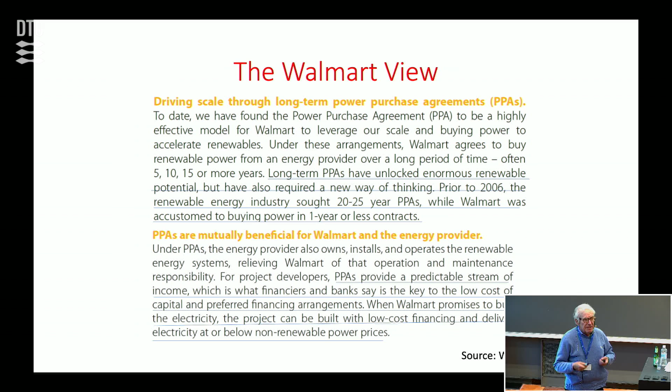So they finally have come to a decision that they will sign PPAs on the order of 10, 15, maybe 20 years, and they would use the fact that they have a very high credit rating to provide the developer, who may have a rather low credit rating, with financial security. The PPA provides the backing for going to the capital market to borrow money to finance the development of these facilities.

David Newbery has done quite a bit of analysis in the context of the latest reform of the system in the UK, or Great Britain, I can never keep them all straight with all the aggregations. I think it doesn't include Northern Ireland. But basically he shows that if you can shift some of the risk to creditworthy buyers, in the case of the UK, the government, you can reduce the cost of capital very significantly and reduce the ultimate cost of the PPA. So that's what's driving this.

So I'm going to focus on the U.S. Let me just say a little bit more about ISOs than Dick did. First of all, this picture, I want to make two points. First, it's not to show Canada as the 51st state. It turns out that for many years, the electric power systems between Canada and the U.S. are synchronized with one another. The major exception is Quebec, which has its own hydro-based system.

They export to the U.S., especially to New York and New England. However, integrating them into an AC system would be very challenging, so they're DC connected. But basically, the U.S. and Canada have integrated systems.

But you'll also notice on this chart that there are blank areas, and there are blank areas because we have utilities, primarily vertically integrated utilities, that are not in any ISO. Up here, you can see that the US system is really quite complicated from an industrial organization perspective. There are investor-owned utilities, regulated by both FERC and the states. Some of them are vertically integrated, some have divested their generating capacity, some are in ISOs, and some aren't.

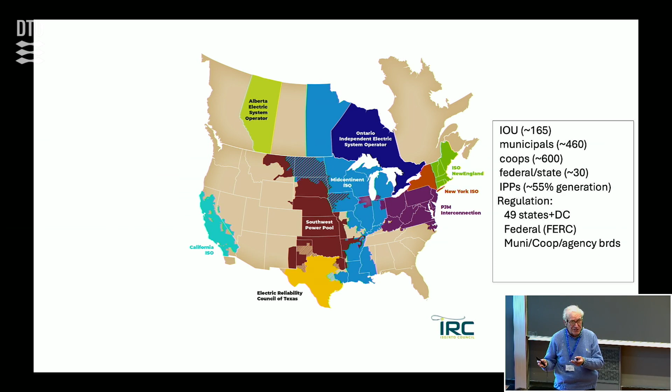If you follow elections, we have red states and we have blue states. For reasons a political scientist really has to answer, the blue states are the ones that have restructured and rely on competition, and the red states tend to be those that haven't, or if they've joined ISOs, they tend to still be vertically integrated utilities.

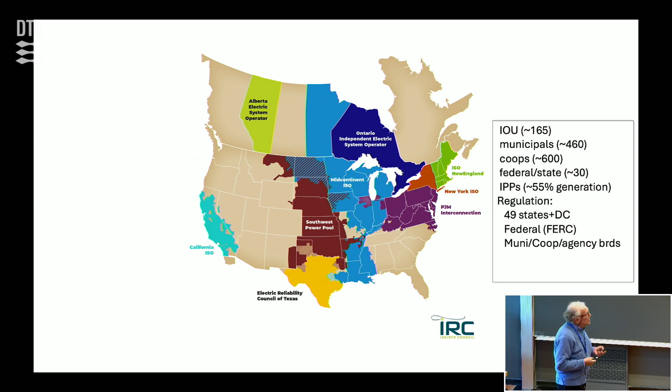So Dick talked about the ISOs. I'd like to just show you some examples. I won't go through what ISOs do because Dick discussed that. But here's PacifiCorp, a partially vertically integrated utility in the Northwest US. It's not in an ISO. It's owned by Warren Buffett's company, Berkshire Hathaway. They have an energy company, and their largest share ownership is in PacifiCorp, which serves multiple states in the West.

They also own Nevada Power, now NV Power, as a separate utility. And they operate in states, particularly Washington and Oregon, that have tight decarbonization commitments. They also operate in, I think that's Utah, which doesn't. So they face some challenges in how to balance their system, and they do it based on traditional integrated resource planning, figuring out the cheapest way of meeting demand. They've concluded they're closing their coal plants and putting in investments, especially in wind and some in solar.

Wyoming, which is up here somewhere, has a lot of wind, especially down here. Unfortunately, no one lives in Wyoming. There are a lot of cows, cattle, horses, rabbits, but less than 700,000 people live there, and that many people went to my high school in New York City.

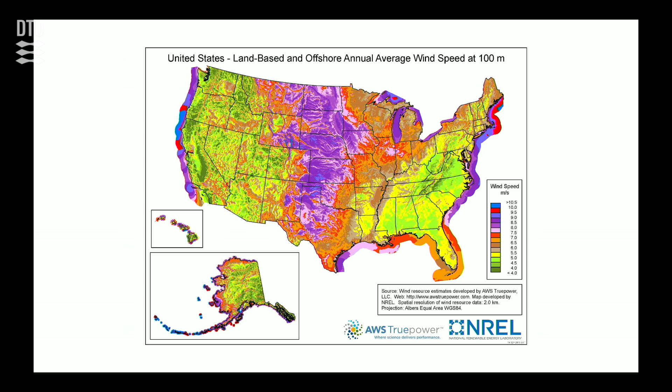Okay, so where is the wind and the solar? Unfortunately, it's not everywhere. The big wind zones in the US are in the Great Plains, stretching into Canada, all the way down to northern Texas, the Panhandle, and along the Atlantic coast, especially up in the northeast, and along the Pacific coast. The difference between the Atlantic coast and the Pacific coast is on the Atlantic coast, you can put wind, but you've got to put it where people can't see it.

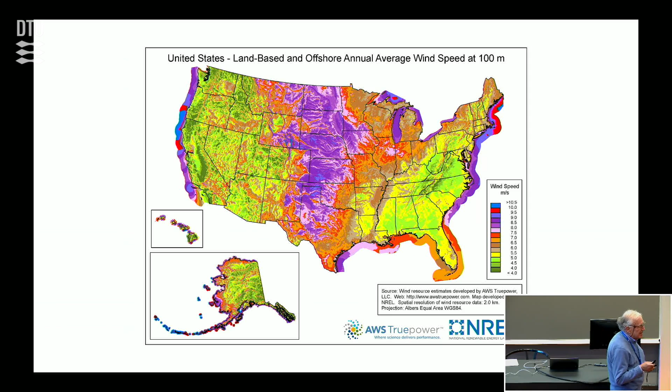I think Dick said they're too noisy. Well, if it's 30 miles away, it's hard to hear, so you get less opposition. Unfortunately, there are no incumbent transmission facilities 30 miles out in the ocean, but it's shallow, so they can use well-developed European technology to develop wind. I'll come back to talk about that, because several European companies have had some bad experiences in the Northeast, especially recently. Along the Pacific coast, it's deep, and you've got to use floating windmills, and there really have been none developed there. If you look across the world, there aren't that many floating windmills, and I think that technology is still relatively new.

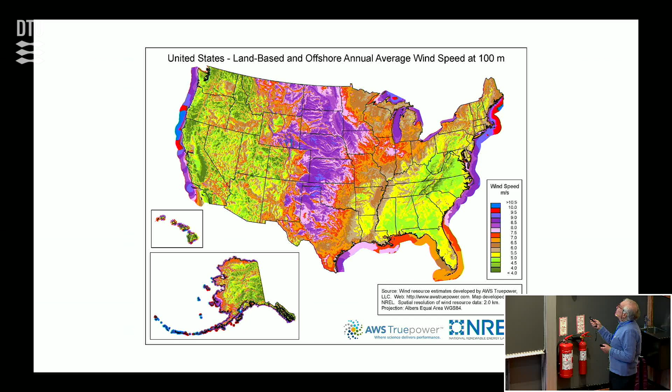So the wind belt is where wind is really important. Then there's some areas in northern Maine and in northern New York State, and in principle in the Great Lakes, that are pretty windy. The problem is northern Maine looks great on the winds, but there's no transmission up there. There's nothing up there, actually. A few people live there.

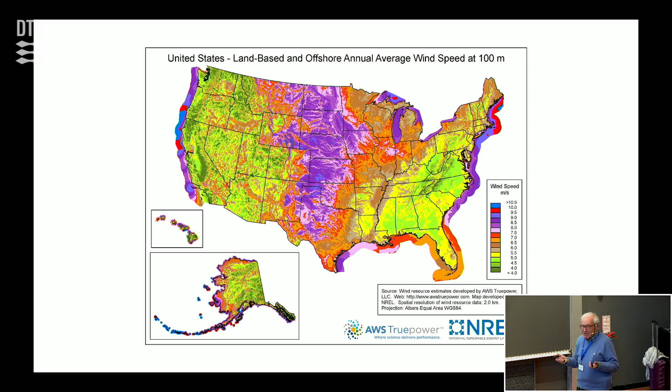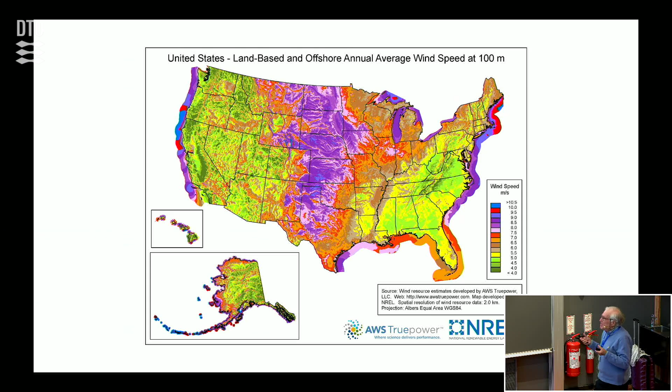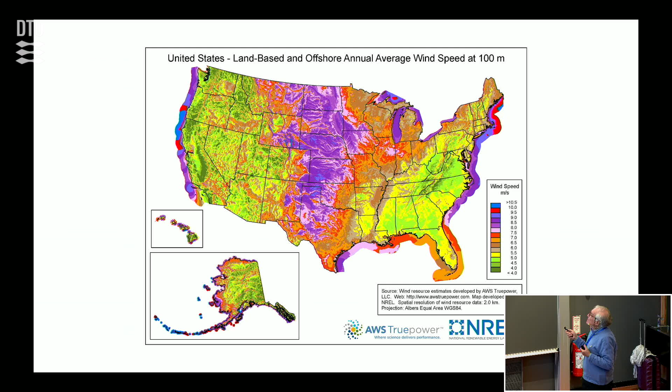There used to be trees there. They cut them down. They used to farm potatoes, not very profitable these days. So transmission becomes an issue for accessing these areas and bringing the power from where it's cheap to produce to where it's needed, where the demand centers are. So, for better or for worse, not that many people live there, and there's not that much load in that part of the United States. Now, sun is the same story.

If you've been to the US, especially the Southwest in the summer, it's sunny, it's hot, big empty areas—ideal for solar farms. The Southeast, it turns out, is pretty good, but the air is dustier, and you get more reflection. And the Northeast, where we have all these commitments, is terrible.

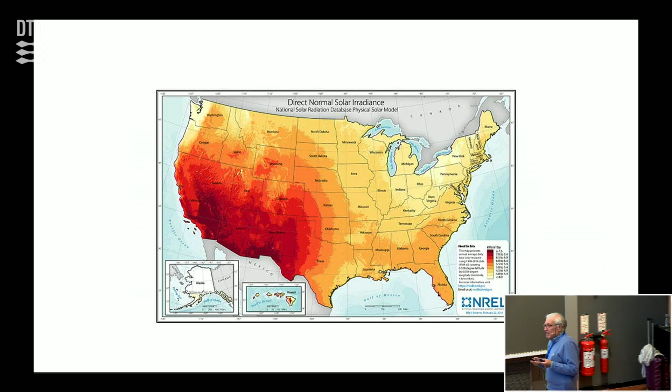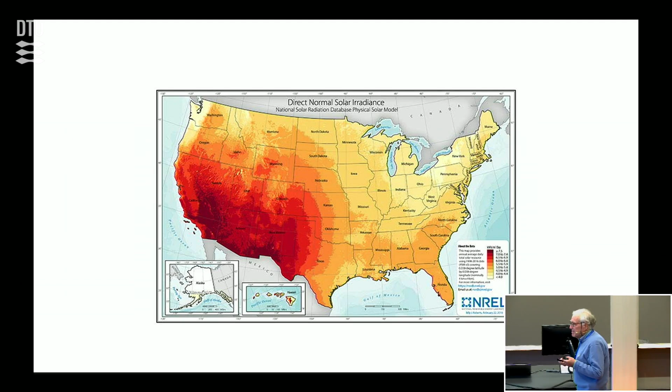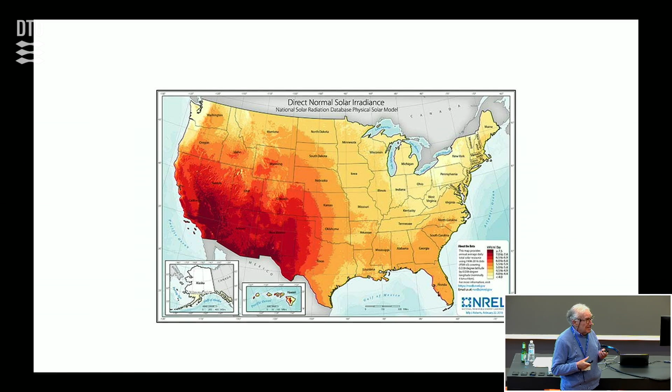The economics of solar there are bad, and they've had to be subsidized very heavily. They've especially subsidized rooftop PV, which for reasons that escape me are always outside the calculations. But that's been very important, especially in Massachusetts, believe it or not—adjusted for population, it's the third most solar-intensive state in the country because of massive subsidies.

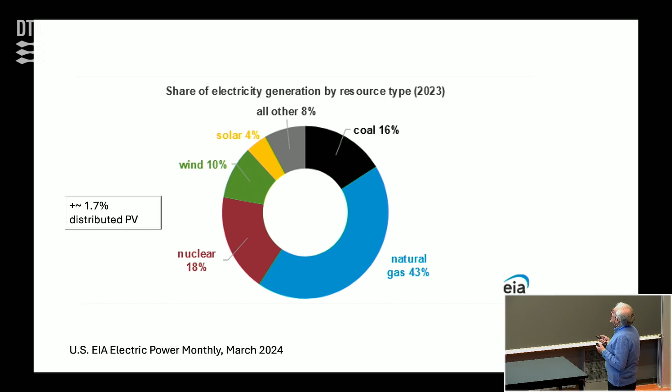Okay, so overall for the U.S., we have about 15% wind and solar. We still have quite a few nuclear plants. Coal has gone from 53% of electricity generation to 13, 14, 15, 16%—it varies by year, last year was a little higher. But coal plants are retiring rather quickly, either for economic reasons, cheaper natural gas in particular, or because of this push to add wind and solar and the economics associated with that. Overall you can see wind and solar, this is March 2024.

It's probably over 15, 16% now in the US, but it varies by state. Let me just make this point: if you look on the margin—this is before Trump was elected, in 2024—almost all the new generation was wind, solar, and batteries. So the U.S. was on a path to decarbonization with a combination of federal laws, which I'll come back to, state laws, which are binding in many states, and reductions in cost of wind and solar.

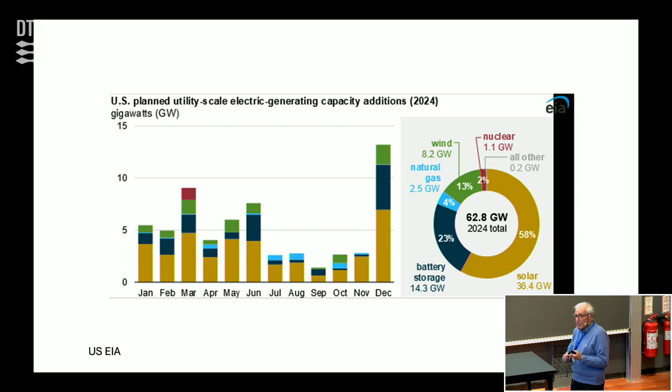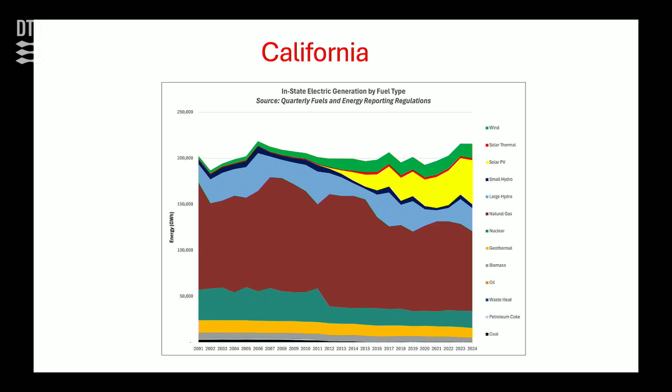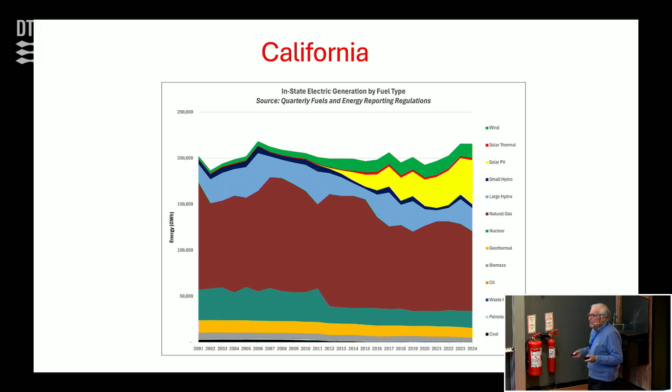Now the states vary. This is California, which has a net zero commitment. It's also the first state to develop wind. It has quite good solar resources, especially if they can be brought in from the desert with transmission lines, which are being built in California. You can see this is wind, and this is solar—that's thermal solar, which had a brief enthusiastic development. This is large hydro. They still have nuclear there, two plants operating, and they have no coal—it's gone. They have gas, quite a bit of it, and they also have batteries, which I'll come back to. So they're on their way to decarbonization as a result of state and federal government policies.

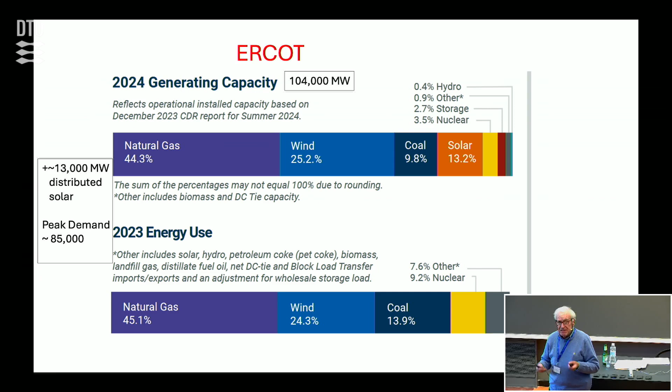And this is Texas, ERCOT—an oil and gas state. But the economics are so attractive for wind and solar there that Texas now has the largest generation from wind and solar energy. They still have a little bit of coal, a little bit of nuclear, but wind, natural gas, and solar are their big sources of generation. As you might expect, since it was an oil and gas state, the governor is trying to do something about this—he thinks this is terrible. He thinks for reliability reasons we need more gas plants, and they're in the process of putting in state regulations to try to restrict the expansion of wind and solar and to promote natural gas.

So what are the attributes of wind and solar that are relevant here? For my discussion, the primary attribute, aside from the intermittency issue which the ISOs are trying to deal with—there are other attributes. In the case of wind, it varies by time of day, can vary by season, it's location dependent, and its costs are mostly capital costs. This is the primary consideration: it has very small marginal operating costs, on the order of $2 a megawatt hour, so the short-run marginal cost is very low.

Inverter technology has issues, at least up until now—it's limited the provision of ancillary services without also having batteries. But smart inverters are being developed; it's a research area, and my colleagues in the electrical engineering department at MIT who work on power electronics assure me this will not be a problem in the future.

I hope they're right. Solar has some similar attributes: it's intermittent, it's seasonal, and unfortunately the sun doesn't shine at night—someone ought to fix that. People always say, well, that's because the sun goes down at 7 o'clock. Well, the sun doesn't go down, the earth rotates. But nevertheless, for explaining it to your neighbors, you tell them the sun goes down. And then they say, well, what do you do then?

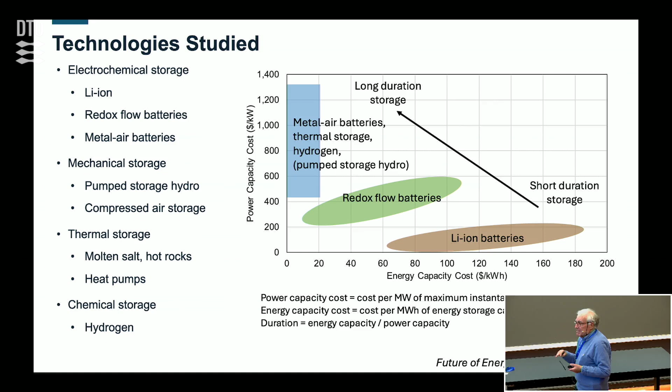The technologies being developed, redox flow batteries, thermal storage batteries, frequently referred to as long-term storage, have higher capital costs but lower storage costs, lower kilowatt-hour costs. In the long run, we're going to need those as well to deal with long periods of time when there's no wind, or periods of time when demand is fairly high at night in a solar-dominated system.

And our study is online. You can read it. It's kind of outdated.

Yes, sir? I have a question about the energy cost. Do you have some update from '22? No, we haven't updated. But I'm sure the costs have changed. Yeah, hopefully for the better.

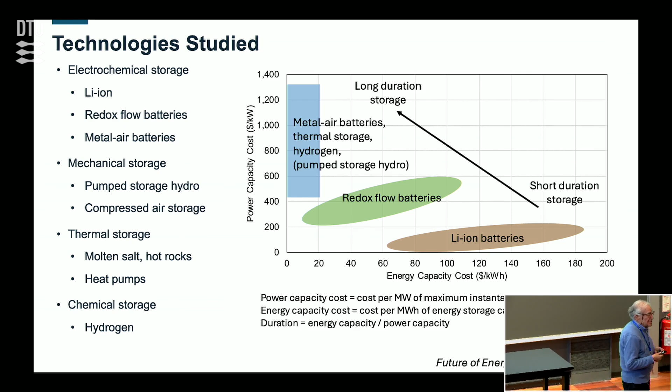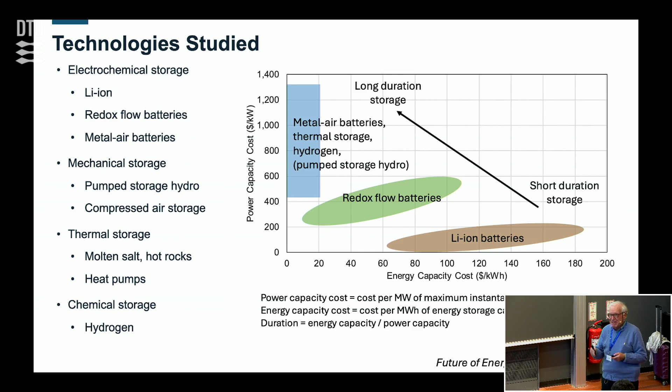I should say something about doing these studies. This was interdisciplinary research, so we had economists, scientists, chemists, and physicists. We had quite a few engineers from chemical engineering and mechanical engineering. Their notion of a good number for a cost and my notion of a good number for a cost are rather different. I wouldn't say they make up the numbers for future technologies, but kind of do. Whereas for lithium-ion batteries, we had pretty good numbers for what the cost would be, because we had lots of examples from EVs and applications in the US and other countries. Just a comment on interdisciplinary research in terms of what people think is most desirable.

Okay, so this is an important part. Where is this demand for long-term PPAs coming from? It's coming from a number of different sources. The first source is states, like my state, that realized they were never going to meet their commitments to decarbonize if they just let the market work. So they've gone out and done required and managed procurements of wind and solar. Massachusetts, Maine, Connecticut, New York is very big on this, New Jersey, Maryland, District of Columbia, Illinois, California, although that's further on the horizon. They've basically said, okay, we're going to procure, and so far in New England and New York, 30 gigawatts of batteries and offshore wind by 2035. We've identified leasing areas, and we're going to incent developers by taking competitive bids for wind generation meeting certain criteria.

Another source is just load-serving entities, that is traditional utilities, in states that have decarbonization commitments and have required the utilities to go out and purchase wind and solar using 15 to 20-year PPAs. In California, to meet their reserve obligations, the local utilities must purchase at least 65% of their generation under long-term PPAs with wind and solar, and more recently batteries, to help meet the state's commitments.

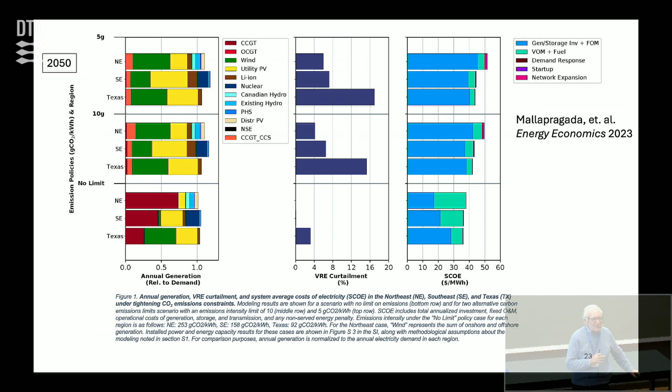The model — this is when using models, you have to apply a little bit of external knowledge to it — the model wants to build nuclear plants in New England. It just loves nuclear plants in New England, even if you put in pretty high costs. The thing is, if you live in New England, the thought of getting a new nuclear plant licensed is really hard to imagine.

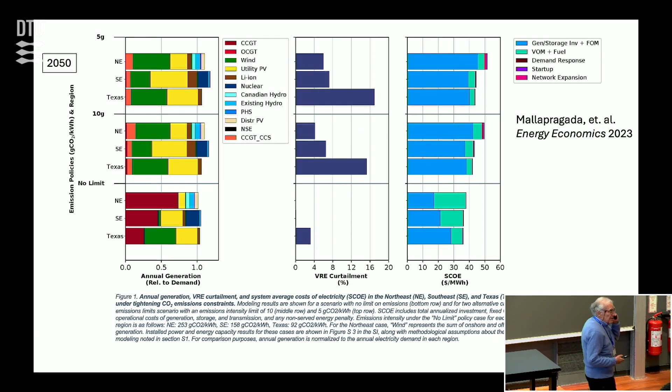So we just turned it off because we thought it was unrealistic, at least at the time frame we were looking at—this is 2050. Maybe it would happen, depending on what happens to costs and safety and so on. But because of the nature of the underlying resources, it wanted to build nuclear even at fairly high costs. We decided we wouldn't allow it to do that. Nuclear is an option we want to give some consideration to down the road.

Another point I want to make: when we make it very constrained, that's 5 grams per kilowatt hour of CO2, about a 95% decarbonization result. It's very little. The rest is natural gas with CCS here.

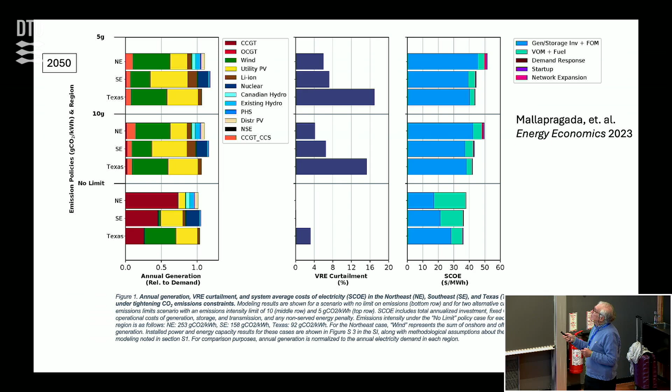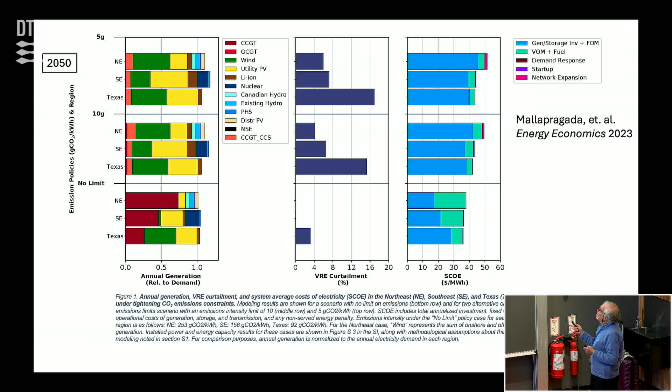As you push them to meet very tough decarbonization requirements, they begin to converge because they've got wind, they've got solar, they've got nuclear if it's cheap enough, and they've got batteries. The brown is batteries. Otherwise they look very, very similar, but the costs are different. In New England the costs are higher, much higher. In the Southeast they're lower. In Texas they're the lowest because they have good resources.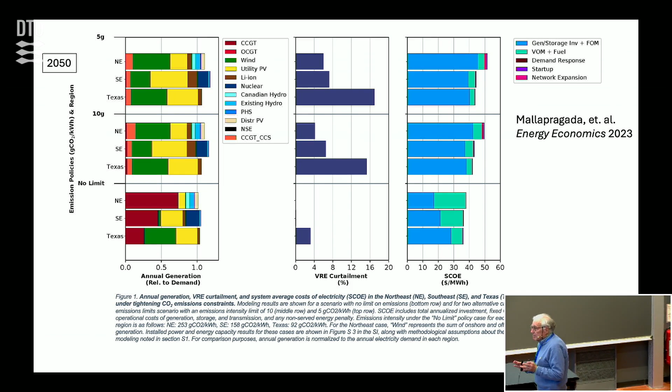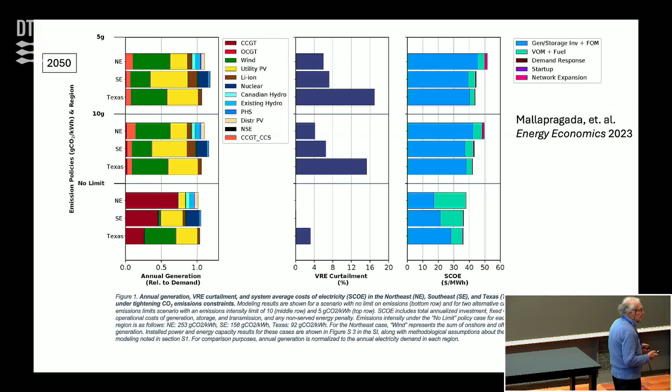And then finally, these are curtailments—that's the third point I want to make. These are situations in the model where the system is curtailed because in certain hours there's too much wind and solar to meet demand. If you're going to meet demand with mostly wind and solar on the peak days in winter or summer, there are going to be days with much lower demand where it's still windy and sunny, so you've got to turn them down. Curtailment becomes an important issue as the system approaches being fully decarbonized, and that's an issue with the PPAs that I'll discuss.

Okay, this is another part of those simulations—prices change. This is for Texas, ERCOT. This is what the price distribution looks like. It's got a lot of prices in this range, $5 to $50. As the system gets tighter and tighter, I wouldn't believe zero. This is an LP model—I don't know what happens when you get to zero, I don't know where it gets pushed, quite frankly.

So if you look at 1 gram, that's roughly 99%, the price distribution changes. You get very few prices in the middle—you get a lot of prices that are just 0 to 5, really low, close to zero because the marginal cost of these generators, they get pulled up a bit by batteries that are charging. And then you get a lot of prices that are really quite high, 200 to 1,000, compared to very few in between.

And for a developer, this is kind of scary, because we know already that when we get these price spikes—we get them rarely—the public goes crazy about them, irrationally. They don't really see most of it. And then the ISO or the regulator comes in and caps the prices. We already have caps in most jurisdictions—the ISO caps are 1,000, 2,500. It's complicated how the caps work now. But you've got to worry that something's going to happen to this market down the road.

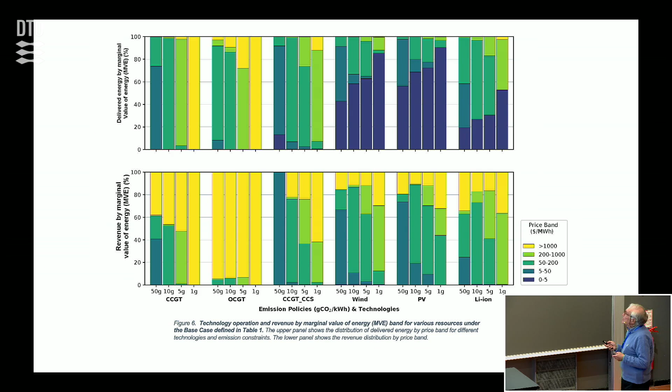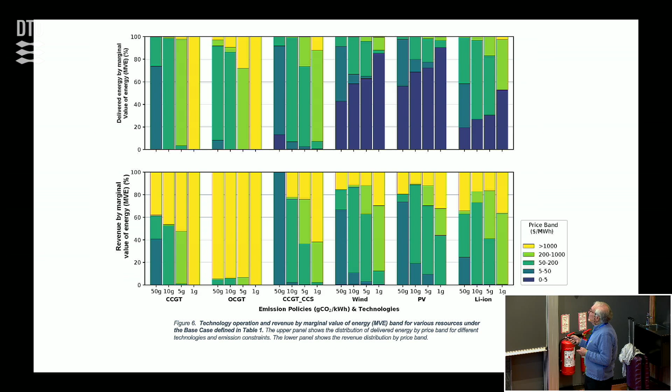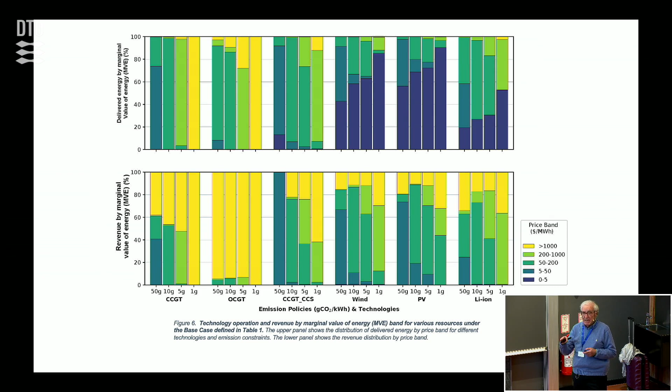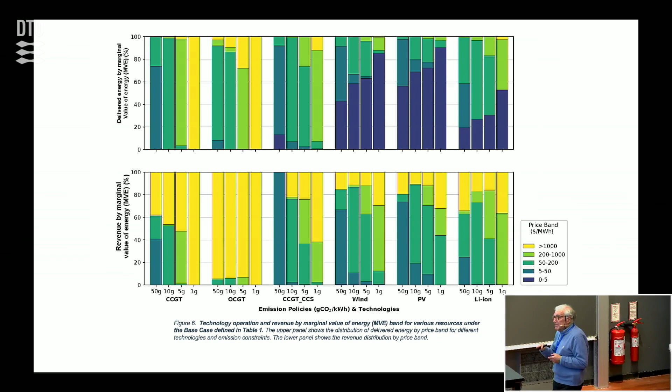This shows for different technologies how much you're relying on high prices to make them economical. If you're down to just one gram for a wind generator, you're getting most of your revenues from very high prices. You've got to be pretty confident that those prices will really be realized and not capped or diddled with in some way adverse to your interests.

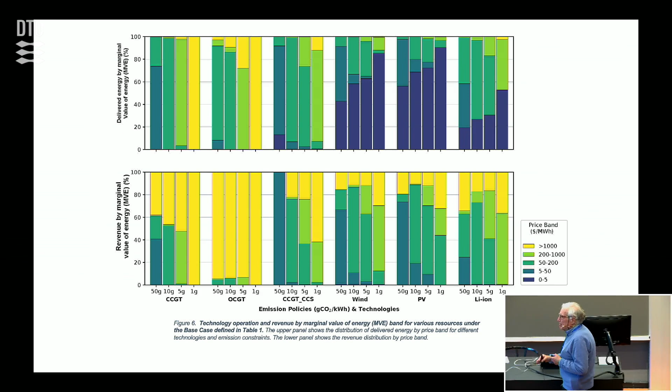Remember, high supply comes from intermittent generation—they supply when the wind is blowing and the sun is shining. They're not like dispatchable generators on an economic dispatch curve that go up and down. These suppliers just produce when they can, and it's economical when the wind is blowing and the sun is shining.

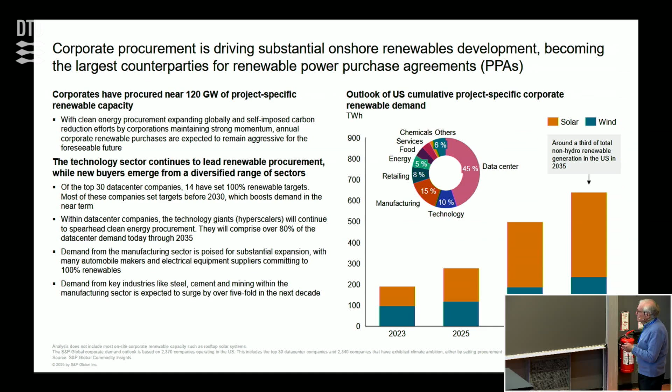Here are the companies—I don't know how accurate these numbers are, I picked them up because no one really keeps track of them too well. Amazon, Microsoft, Meta/Facebook, Google, Total—which is a French oil and gas company. AT&T is a telecom company. McDonald's, you know what McDonald's is. Verizon's a telecom company, etc.

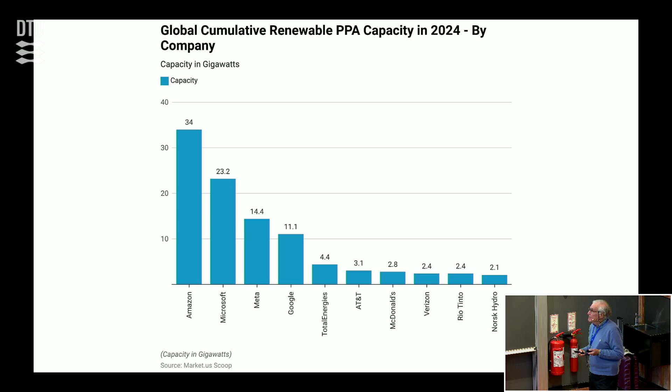Corporate buyers are getting pretty serious about this because they've made decarbonization commitments. Worth a discussion at some point why they've made these commitments in the US, since they don't have to—they're doing it voluntarily. I think it's because their employees want it, maybe their customers want it, maybe management wants it, or maybe they think it's cheaper than buying from local utilities, but that's what's happening.

The marginal cost is, let's call it zero. You're going to want to produce as much as you can, and that's first blush, a very good thing. The fixed costs are all recovered through a megawatt-hour charge. That could be a bad thing.

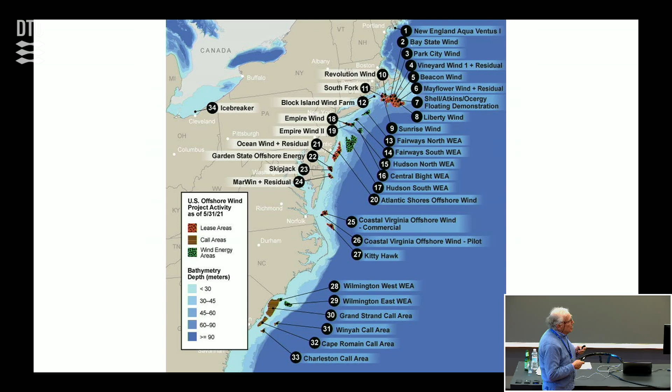Okay, let me just say a little bit about offshore wind. These are the offshore wind sites along the New England coast. As of January 19th, about between 30 and 40 gigawatts of offshore wind contracts were negotiated, and some are under construction and some are under final permitting requirements.

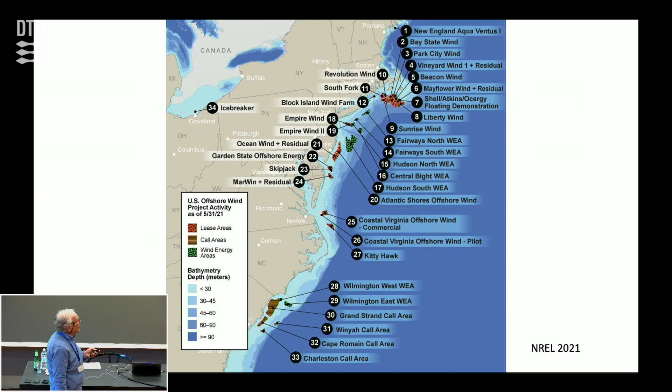And as Dick mentioned, there are all these questions. What comes first? Do you bid for the project? Do you wait until they have a lease? What about transmission? You have to get it to shore. It's not doing anything out there.

And they've gone round and round about that, and there are some market power issues here. If you do the bid for the wind farm first, then it turns out you don't get many bidders for the transmission facilities, usually one. New Jersey, I think, got two on theirs. So Massachusetts' position is we do them together.

And I think that makes some sense. Then transmission is a very difficult issue. It's a generally difficult issue in the US. It's especially difficult offshore. There is no transmission offshore. And the connection to shore and onshore upgrades are currently treated as the responsibility of the generator, even if someone else benefits, but basically it's a merchant project.

The ISOs could coordinate design of the transmission, but by and large, they haven't done that. As a result, you have a lot of projects that have lines running to various points of the northeastern United States, but no offshore network.

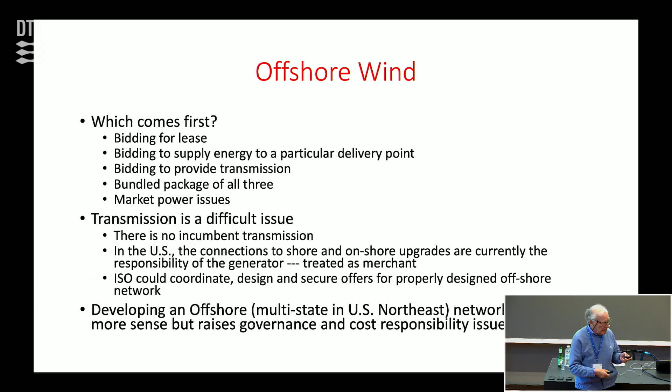So here's an example. This is for New Jersey. They've been very aggressive. You see, each of their projects has its own line, which is a transmission line going to shore. And cleverly, the state of New Jersey and PJM, the ISO, negotiated an agreement that the ISO would help to design both an offshore network and the onshore upgrades that are required. You can't just dump 2 gigawatts of power into Paterson, New Jersey. It's not going to work.

And they did a very good analysis, and part of the deal, and Dick talked about this, part of the question was cost allocation. Who pays for this? Because New Jersey is part of PJM, which has conservative states like Kentucky and parts of West Virginia and parts of Ohio that they don't have decarbonization commitments.

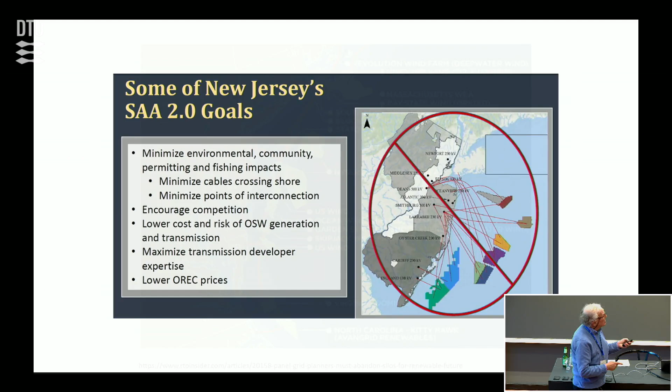They don't want to pay for these offshore wind facilities. So the deal was New Jersey pays. We will allocate these costs only to New Jersey. And if we did this over time, we'd have more of a network that looked like this rather than these individual lines. But this requires not only for the ISOs to get involved, they actually have to cooperate with one another, which they have not been wanting to do.

And you can build a much better offshore network than if you do it the way we're doing it now. And hopefully they'll come to their senses, and the other states will do what New Jersey has done. Now, I want to reinforce another point that Dick made. The decision to allocate the cost to New Jersey, because it was their public policy that required these offshore wind production facilities, it was pragmatic, but it's wrong, because there are benefits that go elsewhere to PJM. In particular, with all this wind coming in, the prices are going to go down elsewhere in PJM.

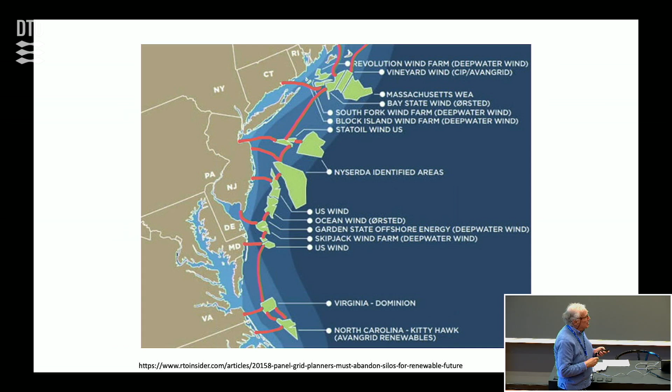And over time, who knows what the benefits will be inside? Who knows what federal law will be? Who knows what state law will be? And Dick is absolutely right. The way this should have been done was they said, okay, for the first N years, say 5 years, New Jersey will pay, but then we're going to reallocate it. And we're going to see whether there are benefits from these offshore wind facilities that are being realized elsewhere in this large PJM ISO. And that was, at least initially, a non-starter, but the right way to do it.

So the conclusions: PPAs are playing a more important role than I think most people realize. They're kind of out there. They're not the responsibility of the ISOs, but they're very important. Much more attention needs to be paid to the structure of these contracts. I think the ISOs could play a consulting role in helping with this. The best practice of PPA design really needs much more attention.

And policymakers need to be less insulated from what's happened in other countries. So I am amazed. I just spoke at a council of all the ISOs. They know nothing about what's going on in Europe. And I'm saying to myself, man, there's stuff to learn there.

Why don't you just read a book or something? And they're just too insulated.

I think there's some of that in Europe as well, in terms of the debates about LMP. It brings me back maybe more than 20, 30 years, to similar debates in the US. And the only thing I can say is LMP works.

It's actually pretty simple now with the advances in the models. It may not be perfect, but advances in computing technology have made it much easier to do pretty complex calculations fairly quickly. I think it would be worthwhile for us to learn from each other. And I will close with that. Thank you.